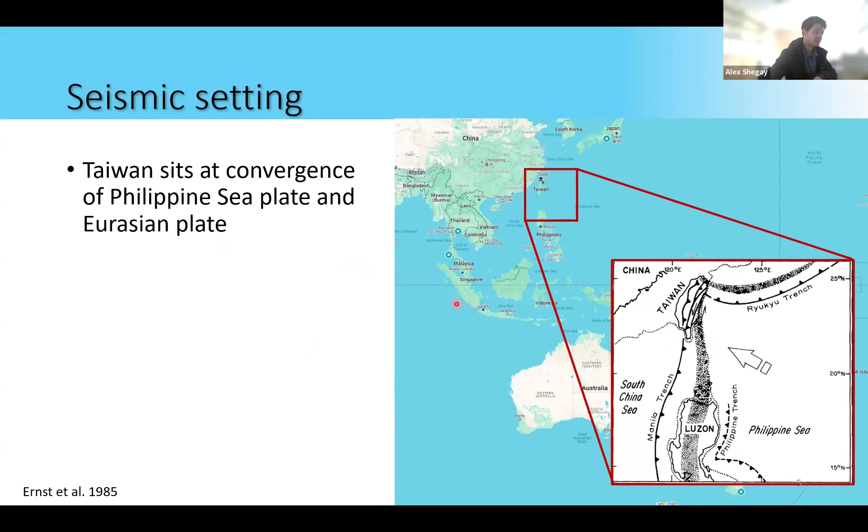So I always like to start with a map. I'm sure most of you know where Taiwan is, but it's always good to get orientated. Taiwan's located just off the coast of China here, about a 10, 11-ish hour flight from New Zealand. So I didn't know this until I started looking into this, but Taiwan actually sits on the Philippine Sea Plate, on the corner of the Philippine Sea Plate, which is quite interesting because it has movements from, I guess, all directions coming into it.

It sits on the corner with the Eurasian plate, and this is an image I found. You can see it's a very old image, but I don't think things have moved too much, should still be accurate. Basically, because it sits on a corner, you've got the Philippine Sea Plate subducting on the northern end and rising over the Eurasian plate on the western end. Most of the earthquakes actually occur in this subduction zone, which is the Ryukyu Trench, but a lot of these earthquakes are off the coast and are not very damaging. The more rare ones that happen where this Philippine plate rides on top of the Eurasian plate is what causes the most damaging earthquakes that they've seen in history.

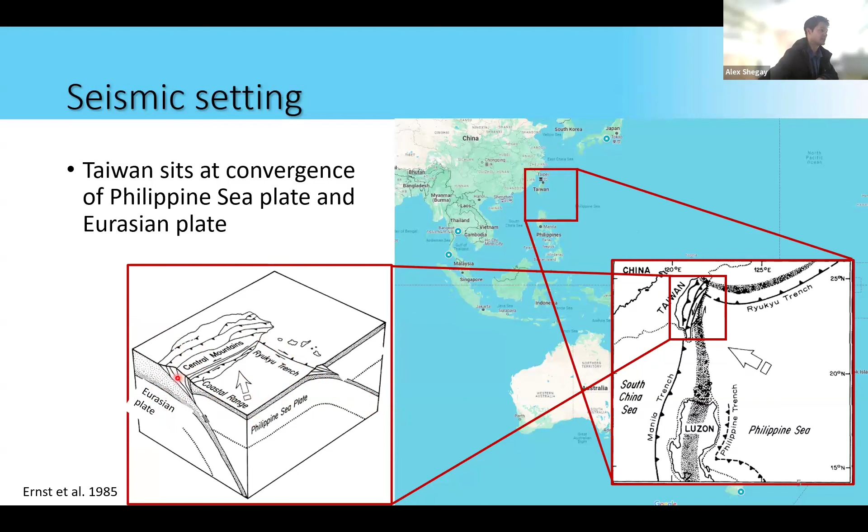So this is a quick overview of previous earthquakes, I guess the recent ones at least. The most well-known, I guess, would be the 1999 Chichi earthquake, but since then, every few years, I guess, they've had another earthquake with very similar looking damage. This is the one we're going to be talking about today.

But in the corner here, I've written a couple more years which correspond to some of the biggest earthquakes in Taiwan, which resulted in the most amount of damage and the most amount of casualties. You can see that between these three, 1999, it seems that quite a significant earthquake happens in Taiwan on average every 30 years. When I kind of saw this history, it made me think of Hualien as that once-in-a-30-year earthquake that seems to happen, causing a lot of damage.

On the bottom here, I won't talk too much about this, but is a history of how the design standard has evolved in Taiwan. Significant changes happened in 1997, 2005, and then in 2011. You'll see that the buildings that we looked at in Hualien were mostly pre-2000s, so before some of these new provisions about consideration of MCE earthquakes and consideration of local site effects came into practice.

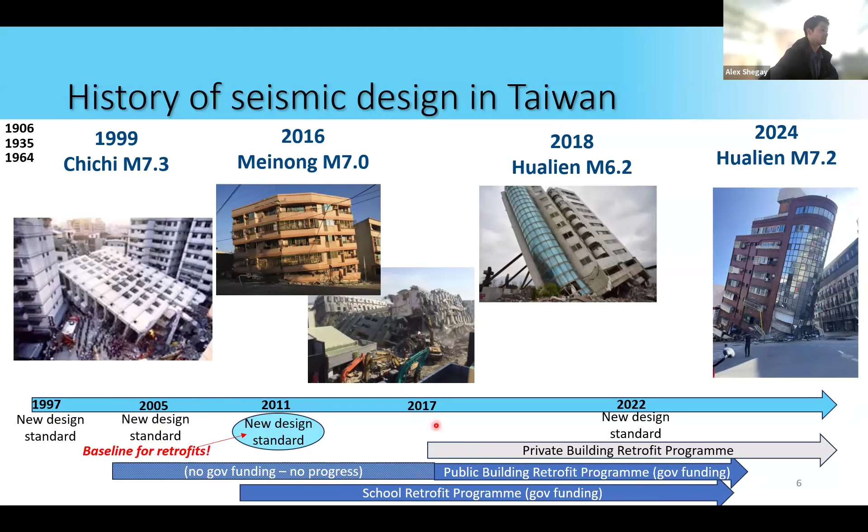So the earthquake overview on the left is the 0.3 second spectral acceleration graph. In the middle is damaged buildings in Taipei at the top and Hualien City at the bottom.

The earthquake happened on the 3rd of April 2024 at a depth of about 40 km, about 15 kilometers south of Hualien City. The epicenter was where this red cross is, but actually it got moved closer to the coast after some revisions, and quite a while away from Taipei City.

In total, about 28 buildings had partial or total collapse, but through all that, only one person lost their life as a result of this earthquake. Even then, that person escaped from the building during the first earthquake and then ran back in to save their cat and died in the collapse of that building in the aftershock, which came about 15 minutes later.

There's some similarities with how this earthquake looks to the Darfield earthquake in 2010 - similar distances from the city, similar depths, and similar fatalities. But what's interesting is even 150 kilometers away, there was damage in Taipei, despite the earthquake being so far away.

The biggest accelerations were felt in the mountains, actually, with Hualien feeling a little bit less than the mountains.

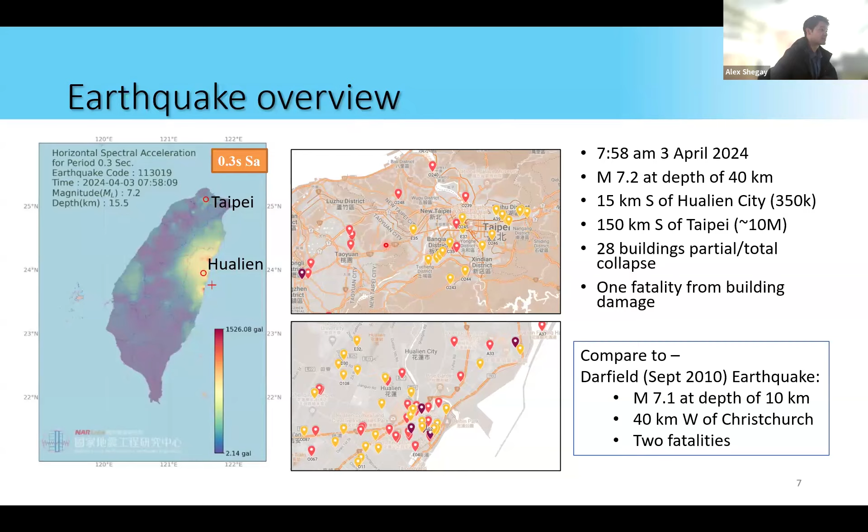So these are some of the spectral acceleration plots around the city. The very first one we saw was this one in the middle, which had high accelerations before the 1 second period mark. The red and purple line correspond to design based on MCE earthquake spectra. So you can see that shaking was very high.

But as we started to discover other spectra in the area, we saw that in some cases, the spectral accelerations above the 1 second mark were also very much above MCE level earthquakes.

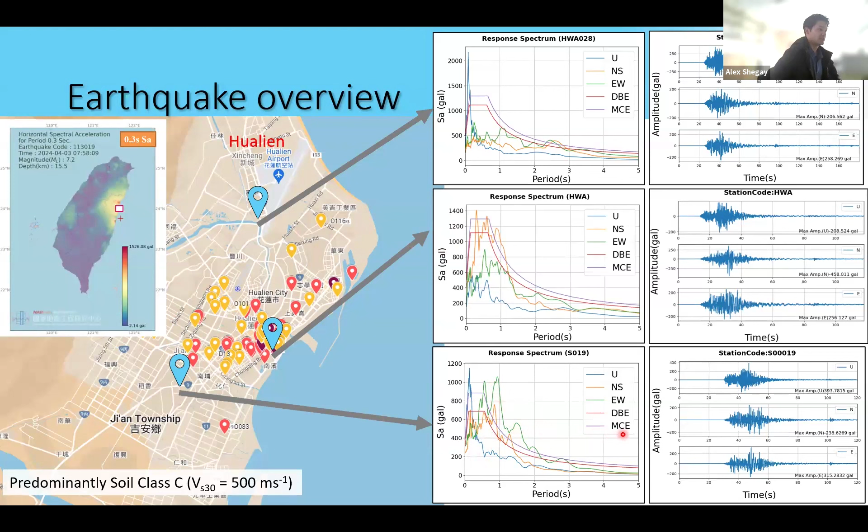So why did we decide to go and do a reconnaissance of Hualien despite not seeing that many fatalities or damage? Well, we know there's ongoing efforts in New Zealand in developing retrofit guidance, and we also knew that a lot of retrofitted buildings in Taiwan performed really well. So that was a really good case study for us to go and understand what they have been doing that seems to be so successful.

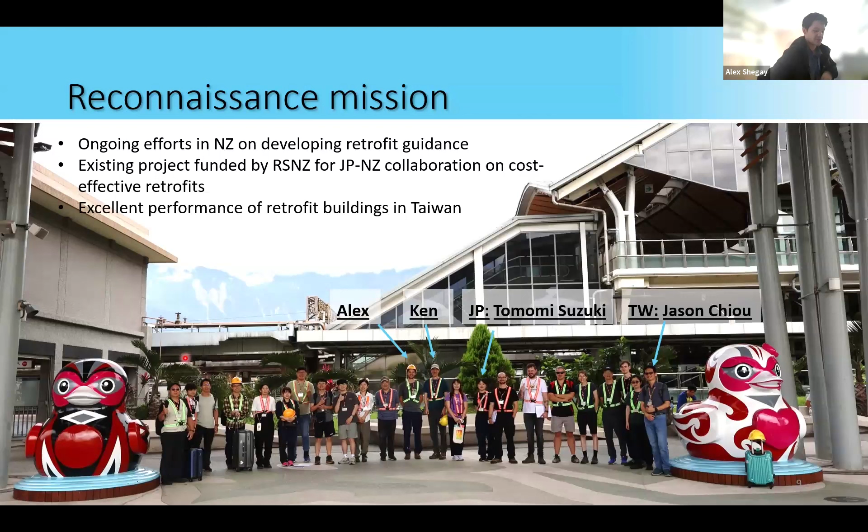On top of that, myself and Tomomi Suzuki, pictured up over here, have an existing project from the Royal Society of New Zealand, the Catalyst Seeding Project, looking into cost-effective retrofits. So all these three things came together at the same time, and we put together a team from New Zealand, from Japan, and from Taiwan, led by Jason, to undertake this reconnaissance, with the main objective being to investigate the policy behind implementation and the performance of retrofits using simple techniques. We'll talk about what simple means a little bit later.

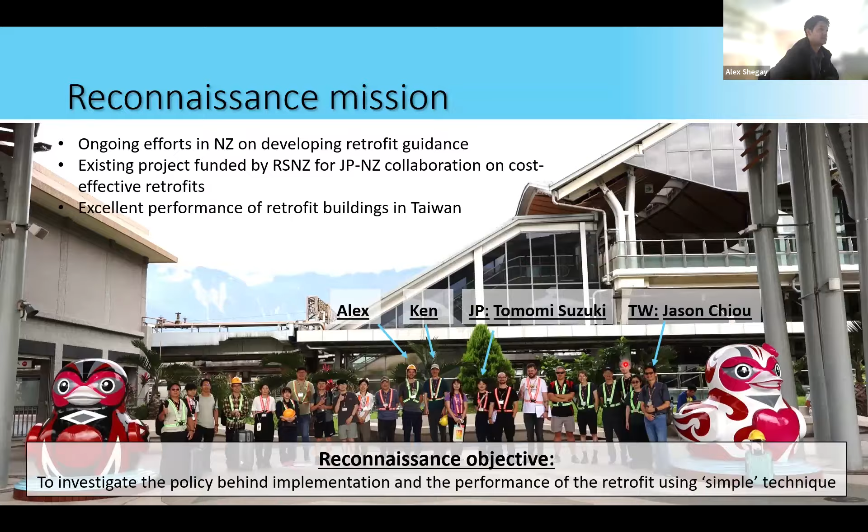So the building stock overview in Hualien consists of corner buildings, which are notorious for being vulnerable to these earthquakes, row buildings - similar low to mid-story height buildings lined up, abutting - and multi-story apartment buildings as well. So the ones that we looked at, a summary is shown in the plots that follow.

Most of them were residential, with the next biggest use being commercial. But to be honest, a lot of these buildings have a mixed use, so they might have a shop at the bottom with some residential floors up the top. So this is just showing the predominant use.

This graph shows the placard given to the building versus how many stories it had. And you can see, despite quite high accelerations at low period range, quite a lot of buildings low to mid story perform quite well, with a lot of these red buildings having some sort of construction deficiency or construction error. The surprise, I guess, for us was a lot of these high-rise structures didn't seem to be performing so well.

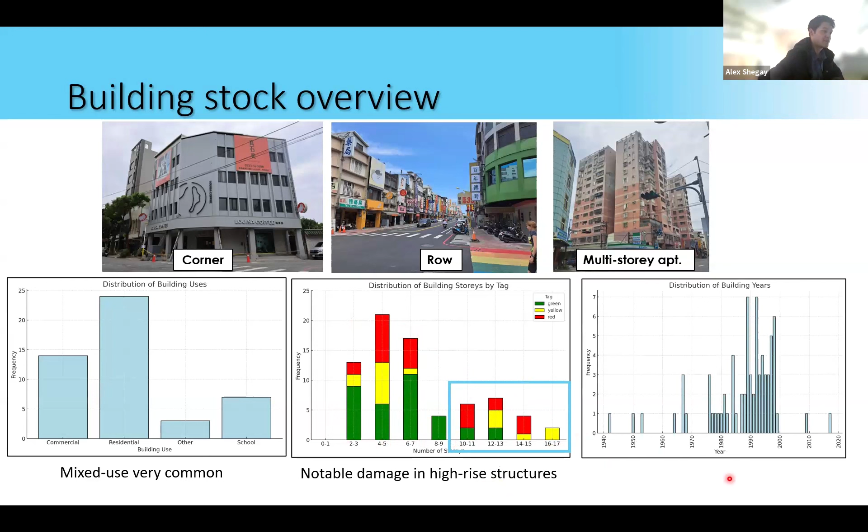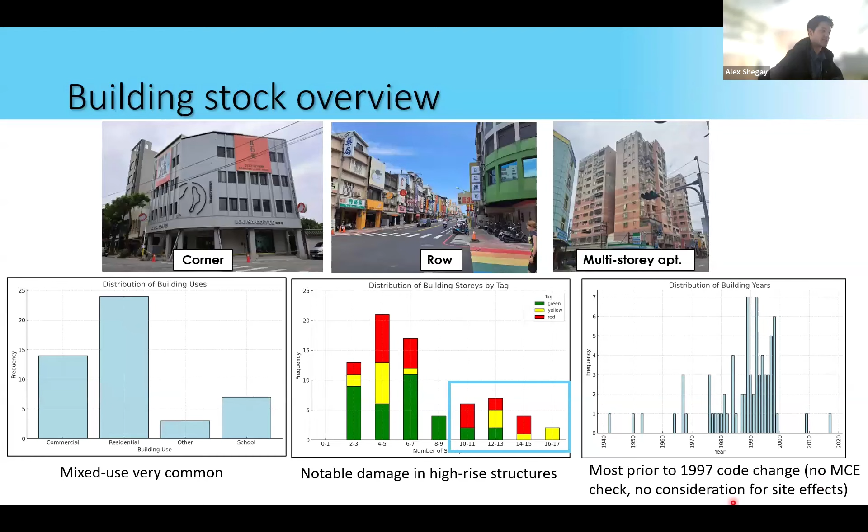In terms of the year, you can see that most of these buildings are before the 1997 code came into place, and before the 2005 code came into place, which is when MCE checks and consideration for local site effects came into play.

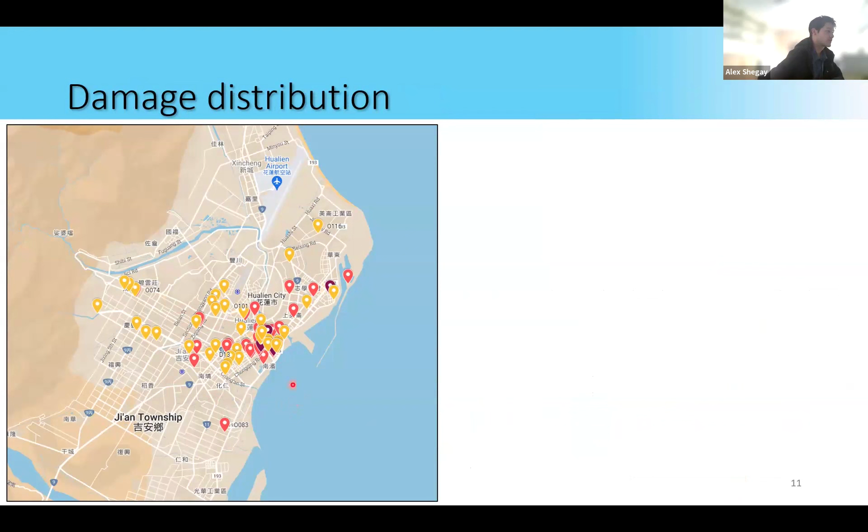So at first, when you look at the damaged building, so each pin corresponds to either a red tag or a yellow tag, with the dark red showing demolished buildings. It looks quite severe, but when you plot all the other buildings that we looked at onto the map, it actually doesn't look so bad.

So the damage was quite dispersed and actually overall quite limited. And there was a bit of a mystery for us, considering that spike we saw above the 1 second period mark in the spectral accelerations.

But when we started to look at some of the other spectral acceleration records in the area, we saw that actually a lot of the areas had reduced demands at the low small period ranges and a peak at 1+ second ranges.

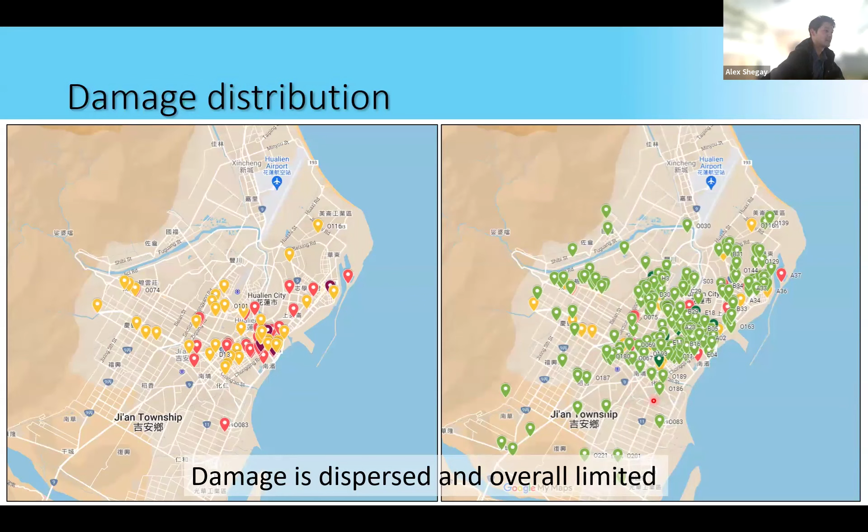So just a quick overview of the damage that we observed for low-rise structures. Here's a corner building. Typically, we often saw hinging in the columns, so it's a soft story collapse, which has been repetitively seen in Taiwan over the past few years in earthquakes.

But it's often accompanied with images like this, where you see either a splice in the plastic hinge under the column, and even when you do have a splice, it's quite poorly detailed. You can see a significant lack of transverse reinforcement. In other cases, the structure had low reinforcement ratio and high axial demands, such as this one here.

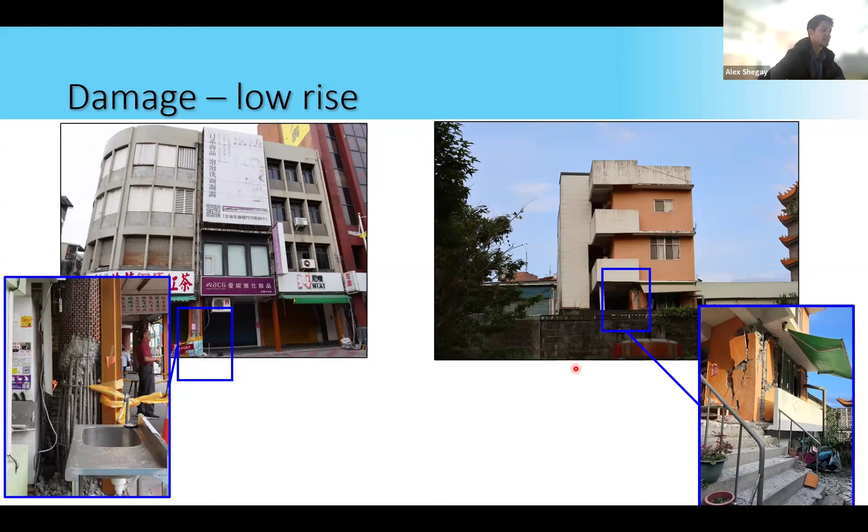One other contributing factor is often that these buildings had an asymmetrical placement of vertical elements. Particularly the corner buildings, this is a plan of this building specifically, you'd often have a structural wall or an infill wall along the back face with some non-structural partitions, which results in a lot of stiffness on the back face and not much stiffness on the street front. And so the torsional response contributes significantly to the damage that we have seen.

Of course, like I said, poor detailing in a lot of these buildings contributed to some of the damage that we saw.

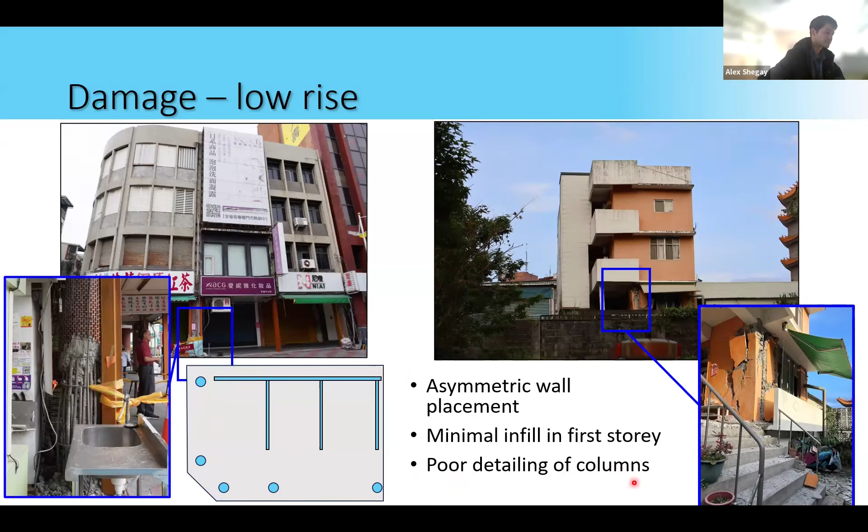For high-rise residential, this is one case study that I'll show, which has 3 buildings on a common podium, with the peripheral buildings experiencing severe damage, with the central building experiencing moderate damage. So trying to figure out why the difference happened despite these buildings being so close to each other.

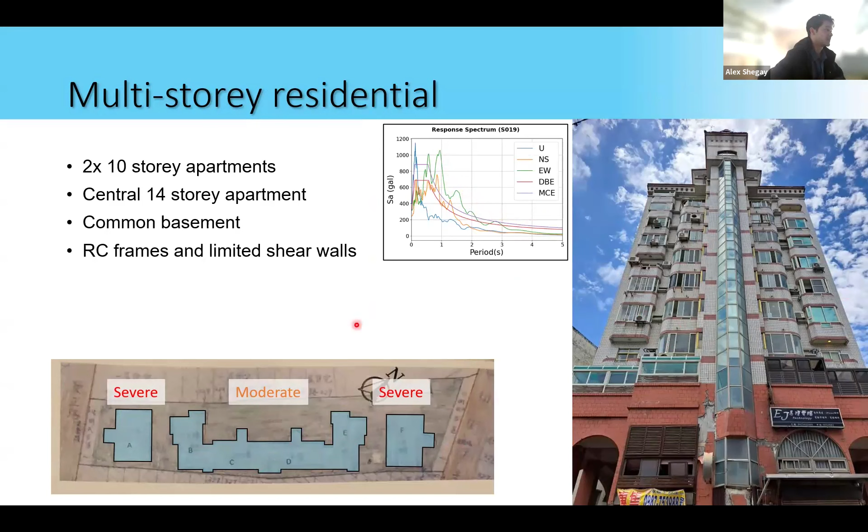Again, like I said, there's that peak above the 1 second mark in the spectral acceleration plot, well above the MCE spectra, which eventually helped us explain why these high-rise buildings were experiencing the damage that we saw. So looking at these peripheral buildings first...

You basically had double height columns on the outside here, but single height columns on the inside, which essentially resulted in deformation incompatibility, and eventual failure of these internal columns.

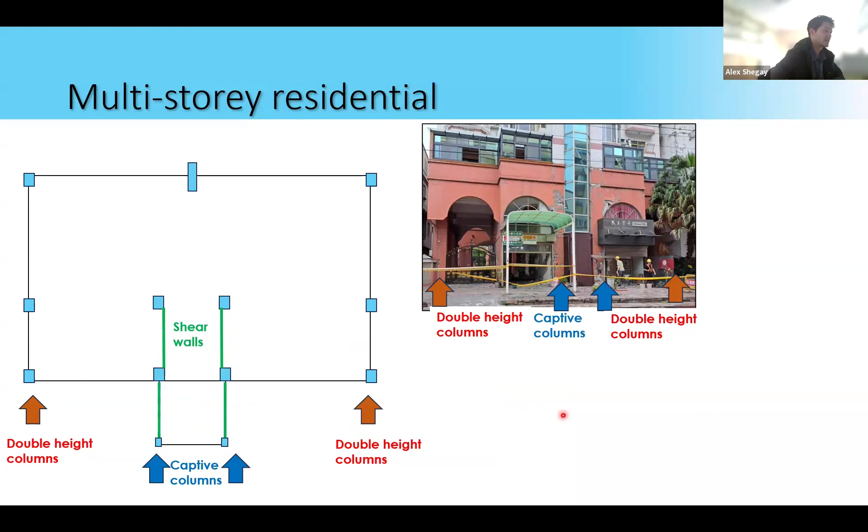In addition, although there were some walls present on the inside in the longitudinal direction, it wasn't quite clear if these were structural walls. They were quite thick, about 250 or 300 millimeters thick, but the reinforcement didn't seem to correspond to that, very lightly reinforced. And so you had quite severe axial failures through the thickness of the walls as well.

In the transverse direction, you can see the spans are very large and there's no walls to take up some of the lateral demands. And so this is part of the reason we think this building experienced the damage that we saw. Of course, it didn't help when you have fire hydrants running through your concrete sections as well.

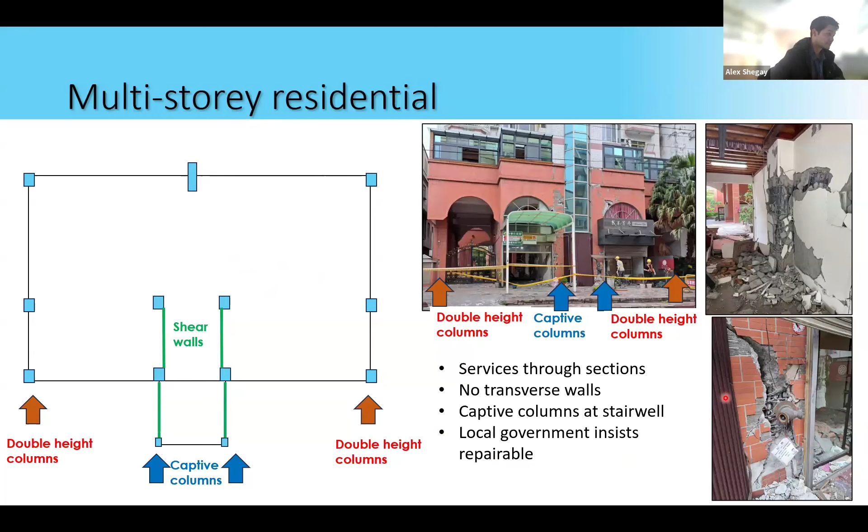In comparison, the central building, which had moderate damage - you can see each one of these blue, yellow, orange boxes corresponds to one of these pictures. Although some of the pictures, some of the damage looked quite severe, such as this picture here, these turned out to be non-structural walls, so like 100 millimeter thick walls with single layer reinforcing. So they would not be considered as severe structural failure, whereas some of the structural walls, which this building did have, didn't have as much damage.

Some light cracking was observed. You can see that the frame in general, this is a picture looking down the hall here, is looking quite healthy overall. Of course, there was, again, some construction issues.

You can see here is a lap splice and the column hinge when all the transverse reinforcement is lumped to the top. So I guess your transverse reinforcement ratio is correct, but not well distributed. And really bizarre cases of concrete cores being taken out of a column, but then getting put back in for whatever reason. So that got exposed during the earthquake too.

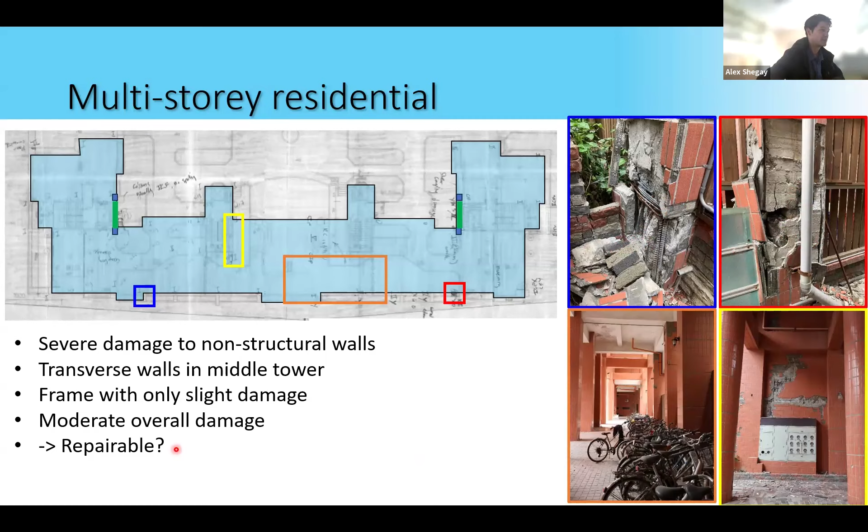So unlike the other one, this one seems potentially repairable, whereas I think the local government was saying both can be repaired. And this is a list of...

Common construction errors that we observed, or in case of partition walls, maybe oversights. So these internal partition walls are not designed to be structural, but they're made of concrete or infill masonry. And so they will act as a structural component, which can drive your shear demands into the columns, causing some of the damage we observed.

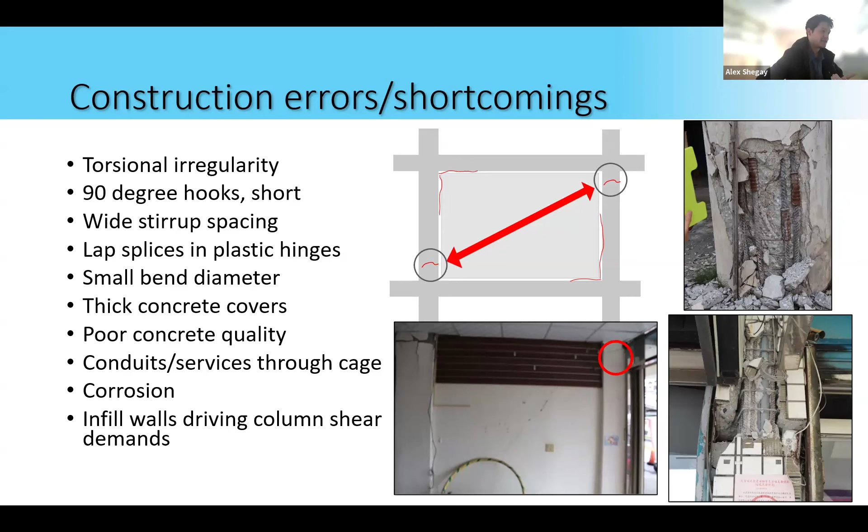There's issues like this where that's just a construction issue where the contractor couldn't get the hoops around the couplers, so they put the hoops inside the longitudinal reinforcement, so that didn't help. Concrete cover in columns being cumulatively thicker than the column itself, and then some PVC reinforcement running through the center of the column.

So in terms of the actual quantitative data that we collected, something called the Hassan index, which some of you might have heard of, is basically two indices, and it's an area ratio of the area of walls over the area of the entire floor plan, and the area of columns over the area of the entire floor plan. So a simple way to think about this is the numerator is your capacity, and the denominator is your demand—how much inertial mass you have on your floor.

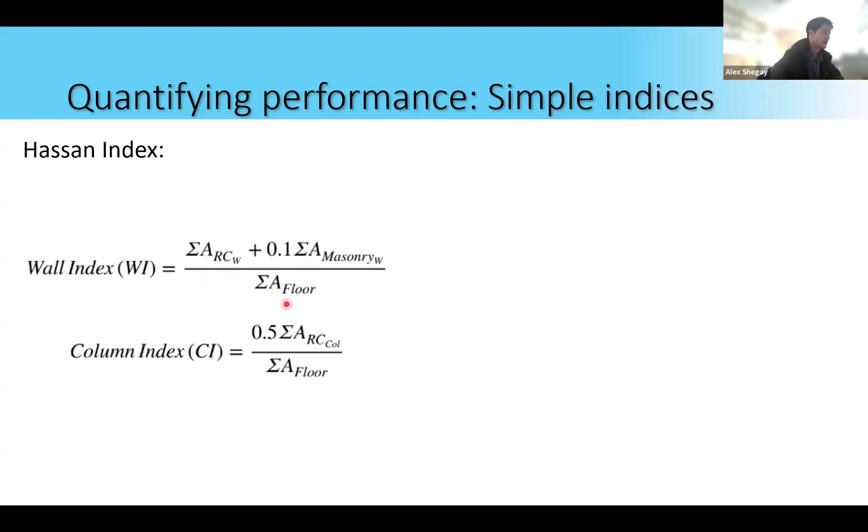Numerous studies in the past have studied how these indices relate to damage. In general, if you plot the wall index and the column index on the X and Y axis, you can think of it as a 2D capacity to demand ratio. Anything in the corner which has not many walls and not many columns should experience severe damage. Anything towards the right-hand corner will have a healthy building.

And data from earthquakes seems to support that in general. Here is data from Taiwan in 2016. This is from, I think, a Turkish earthquake in the 90s.

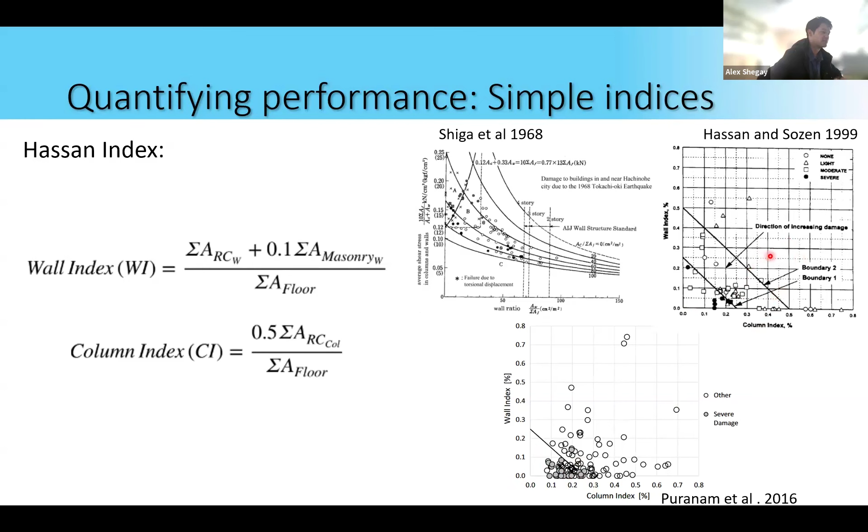So we did the same thing with the buildings that we looked at. We classified them into low damage and high damage, which is the blue and the orange. And generally, the data seem to agree with this red boundary that's been proposed by Hassan, which is supposed to divide your damaged from undamaged buildings.

This plot, of course, doesn't take into account the size of the demand. So you'd expect some blues to go under the line and maybe some orange even go over the line. Of course, it's a very crude index—things like construction errors are not captured.

But one prevalent issue in Taiwan is this issue of having torsional irregularities. So now we're thinking about how we can penalize some of these points for the fact that they have torsional irregularity in the plan.

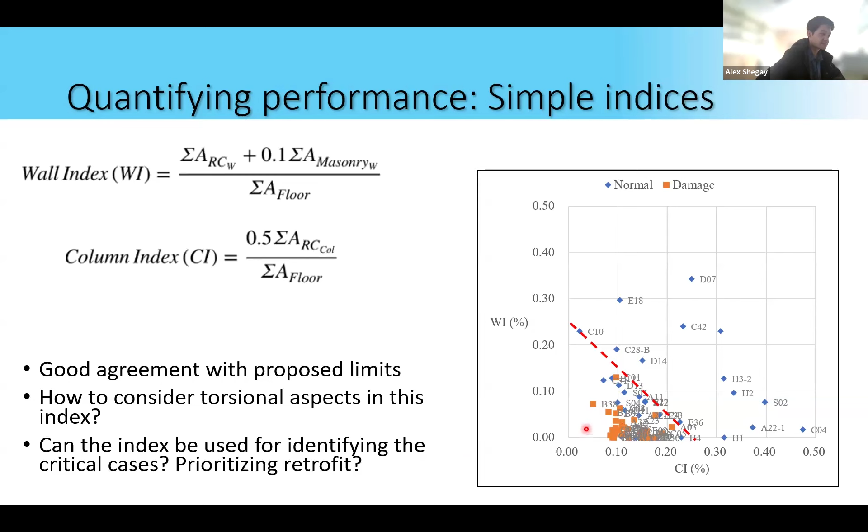Another use of this map is potentially to identify critical buildings in the city that hasn't been struck by an earthquake yet, to say, well, if your building is placed over here, perhaps this will be a priority for retrofit. Taiwan did do this in one of their retrofit programs—they used this method to identify critical cases.

Here is some data of us demonstrating how that may work. This is a building we looked at, E35, which had no retrofit. And this is building E36, which did have retrofit. They're very similar buildings, very similar location. But E35 has a low column ratio. For E36, they injected the columns, put some walls in, and drove this point outside the red line.

And so the impact of that is that this building had axial failures in the columns, whereas this building looked a lot healthier. So this is one way how we can use one of these plots to prioritize retrofits.

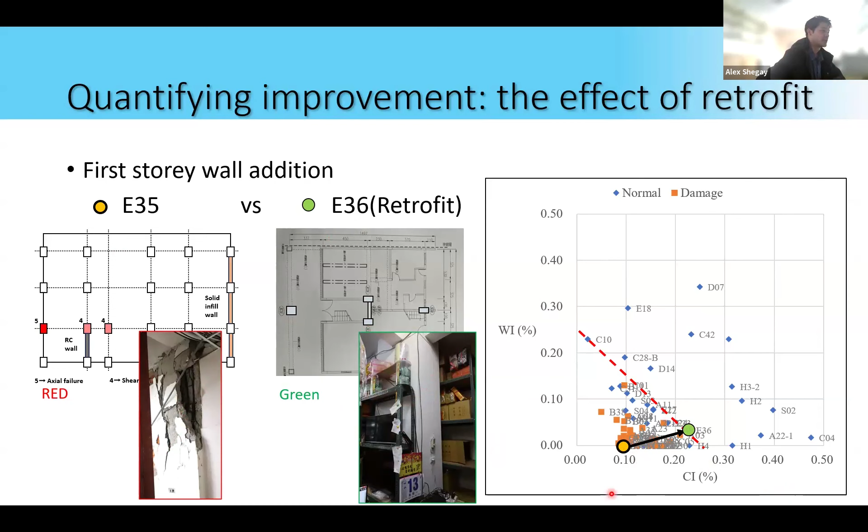I'll pass over to Ken here to continue talking about retrofit in Taiwan.

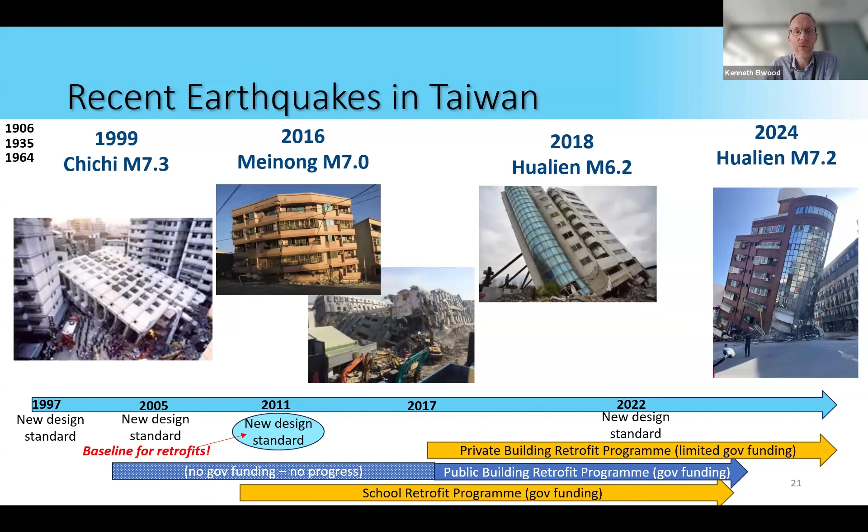We're running a bit behind time, so I may skip through some of these a bit quickly. The school retrofitting program in Taiwan was initiated shortly after the Chichi earthquake, where there were several hundred severely damaged and some collapsed schools.

What I particularly want QuakeCoRE people to notice here is that they specifically ran a 10-year program to prepare for the execution of this retrofit program. And in that time, NCRE did a very significant research program on the performance of school buildings, really trying to refine their ability to assess these buildings and develop cost-effective retrofits.

And then after that preparation, after that research and the development of guidelines, the execution of the retrofit program was initiated in 2009, and it's been running now for over 14 years. The latest numbers we have in terms of the total retrofits are from a couple of years ago, but they're about 37% of the way through.

All indications are that it's been really quite effective.

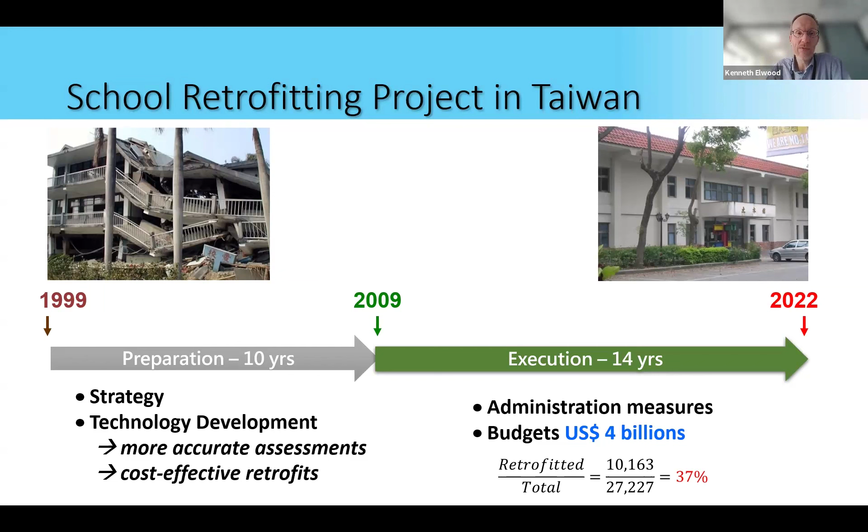Buildings subject to this program are essentially all buildings constructed prior to the Chichi earthquake that are occupied by people. The retrofit requirement is they must be upgraded to 100% of the 2011 building code. If there are any future changes to the building code, that does not affect the target they're retrofitted to. They continue to use that 2011 code as their benchmark.

It's very impressive. They've managed to keep those retrofit costs to about 11% of the rebuild cost of the school. That's remarkable, considering the costs we're seeing here in New Zealand for retrofit.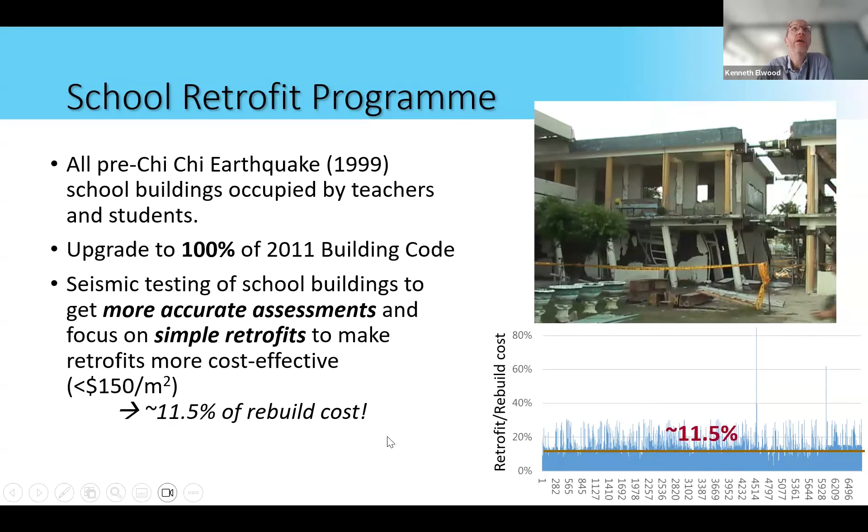One example of a school we visited in Hualien was the Hualien Girls High School. There are essentially two buildings right next to each other. One that was not retrofitted was very severely damaged, probably close to collapse. The other, retrofitted one, almost not a scratch on it—showing the advantage of having retrofitted that building, obviously.

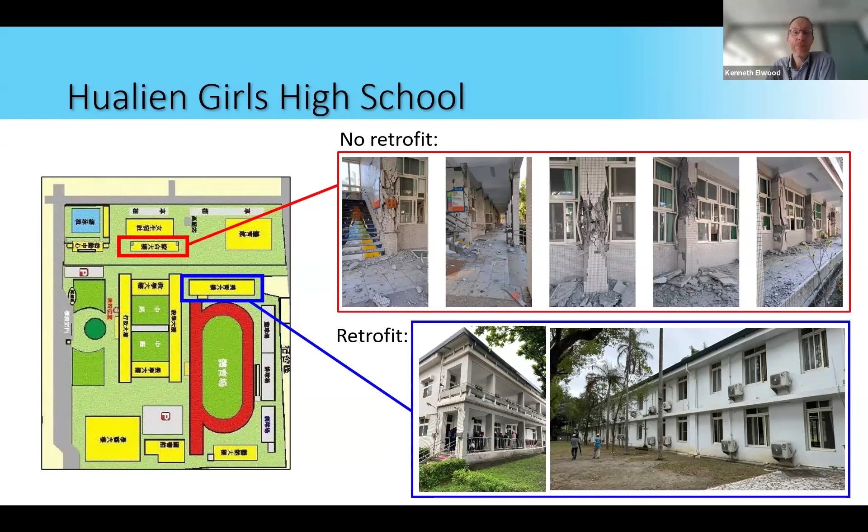The private building retrofit program is quite a bit more complex, as private buildings are owned by all different people. You don't have a single ministry to work with and so on. It is a voluntary program in Taiwan. They're really focused on the concrete buildings, particularly those with soft and weak first stories that have been observed to fail again and again in past earthquakes.

They essentially give two options here: either you do just a weak story retrofit, fixing that prominent vulnerability, or you can retrofit up to 80% of that 2011 code.

There's a subsidy given for this, and there's a limit on that subsidy—that amount is actually pretty modest. When you think about retrofit costs these days, that's not a huge amount, up to a maximum of 230,000, and that really puts pressure on the engineer and the building owner to try to keep those costs down as much as possible, to get as much bang for buck as possible.

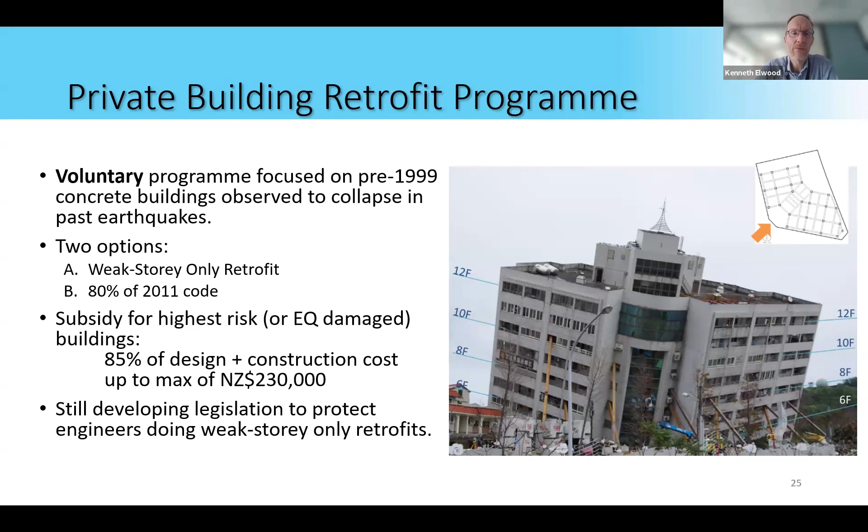There's some discomfort among the engineering community about doing weak-story-only retrofits, where you only focus on that one vulnerability. There's a feeling that in order to roll that out more widely across Taiwan, there's going to be a need to develop legislation to protect engineers using that form of retrofit. That's still in progress, but it has been implemented in several cases.

Here is a building in Hualien that had a weak story failure, and in the background you can see a building that was retrofitted with BRBs, primarily on the first story. There are actually BRBs extending up higher, but it was primarily that weak story retrofit. I tend to call this your biggest bang for buck retrofit.

If you plot the risk reduction you get against the cost of the retrofit needed to address that vulnerability, this is your biggest bang for buck retrofit. In the case of Taiwan buildings, it's relatively obvious what this big bang for buck is—it is this weak story, and predominantly the weak ground story. In New Zealand, as I'll talk about in a moment, it's not always quite so obvious.

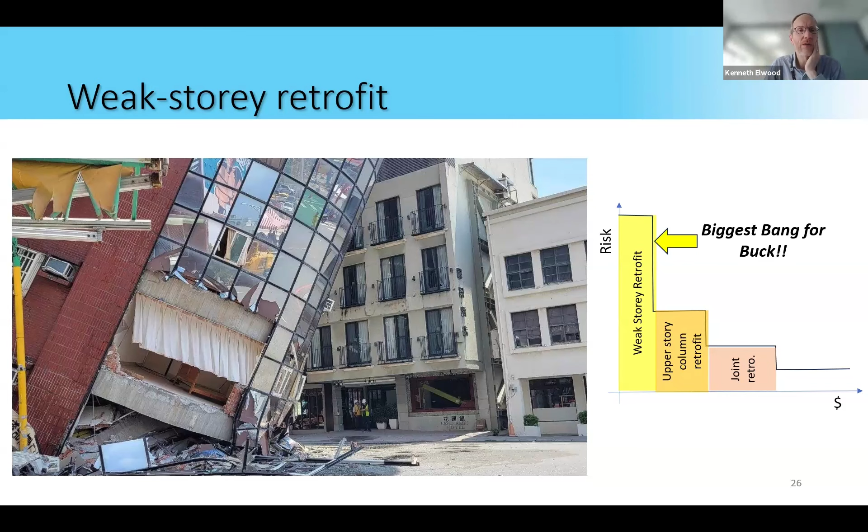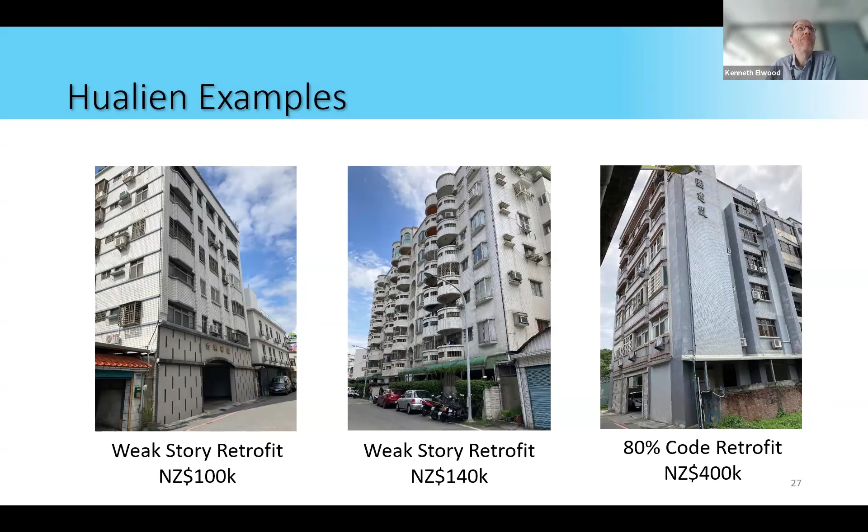So I wanted to think about this in a New Zealand context, and I think probably the closest analogy is really the unreinforced masonry simple strengthening project being developed by the Joint Committee for Seismic Assessment and Retrofit currently. Essentially a similar concept, in that there are simple retrofits focused on the highest risk vulnerabilities.

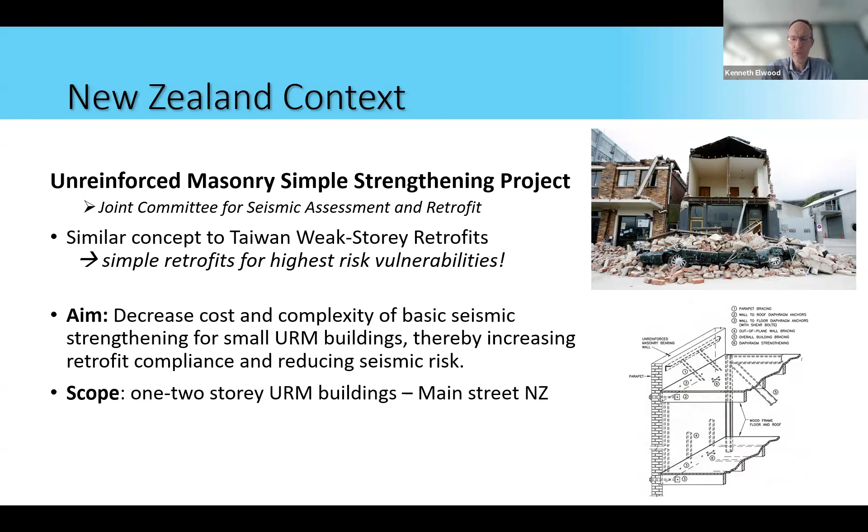This approach is being applied or considered for application on 1 or 2 story unreinforced masonry buildings on sort of Main Street, New Zealand. The idea is that we'd like to reduce the cost of the retrofits, making them simple, off-the-shelf type implementations. This is still a project in development, but it has quite a few similarities to the weak story retrofit approach in Taiwan.

In the case of concrete buildings, I think the situation in New Zealand is a bit more complex, and it's harder to establish that single biggest bang for buck retrofit. We've got precast floor issues, non-ductile walls, connections between the diaphragms and the cores, and multiple weak story issues.

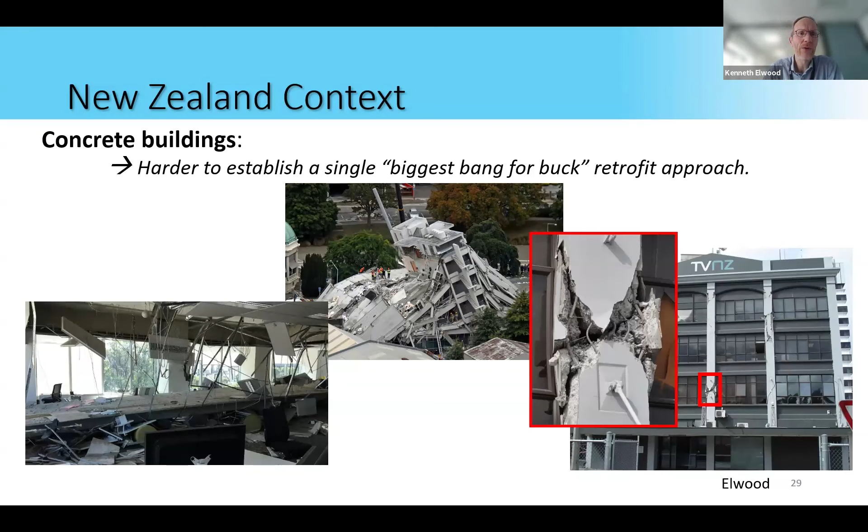So it's not always obvious where that biggest bang for buck is going to come from. I started thinking about, despite that, is there some way we could implement something like this in New Zealand? I'm going to skip this slide for a moment and go straight to the steps.

The first step would be to identify your key building vulnerabilities. For each of those vulnerabilities, assess a risk as low to very high. Then develop simply a retrofit concept, not a full retrofit design, but just to think about what sort of concept would be used to address each of those vulnerabilities.

Then think about what sort of risk reduction you're likely to get from each of those retrofit features addressing each vulnerability. If we had research giving us a cost coefficient for each of those features, in a relative sense, how much more expensive or less expensive one specific retrofit feature is relative to another.

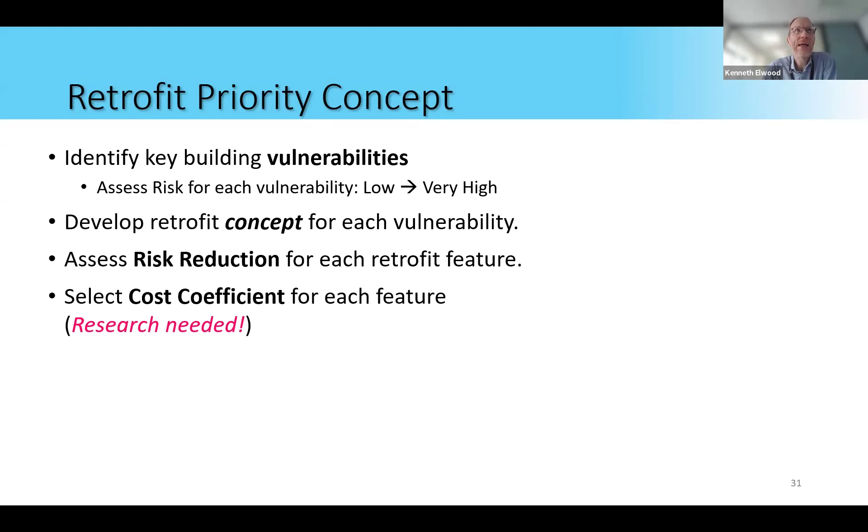Then maybe we could sort these retrofit features by the risk reduction achieved per cost. In that way, we could identify what our biggest bang for buck retrofit is and focus in on that. Maybe that bang for buck retrofit could get us below some minimum risk level we want to achieve, and we could still plan to reduce that further over time by addressing other vulnerabilities.

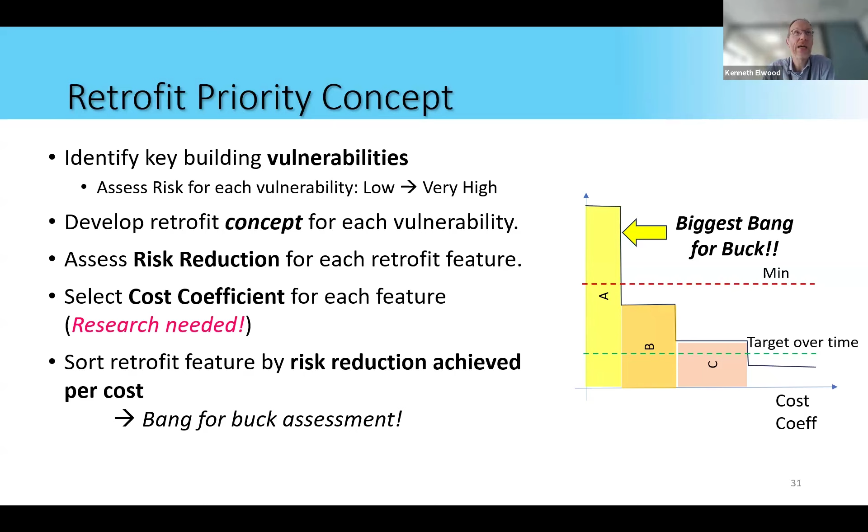This is just a concept. It needs further work on a couple of fronts, but it's something I wanted to share with you as an idea developing amongst the team as we were over there.

The other really big thing is they really focus on cost effectiveness. A good example is their approach to the foundations put under some of the retrofits. For example, if you have a simple frame and want to put in a concrete wall to retrofit it, here in New Zealand we'd likely also accompany that with a pretty significant foundation for that new wall. In Taiwan, they say no, the wall's going to make it better, so let's just leave it at that, and there's a huge savings by not putting in a new foundation.

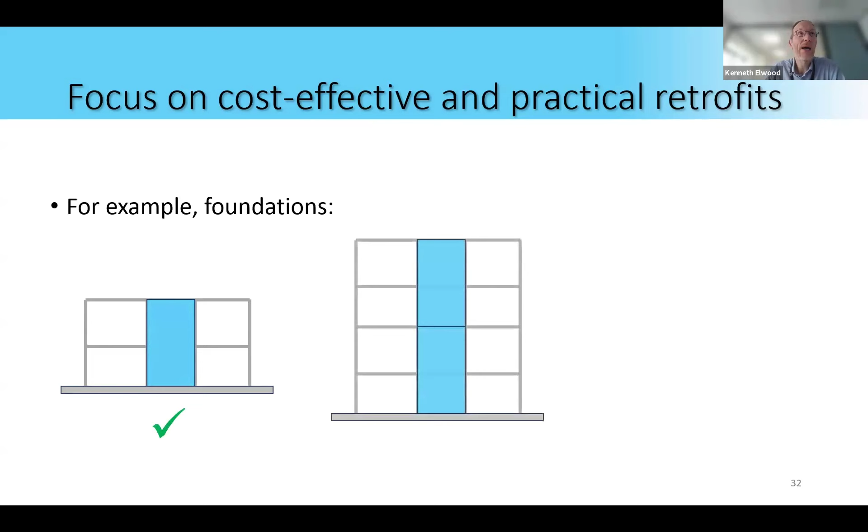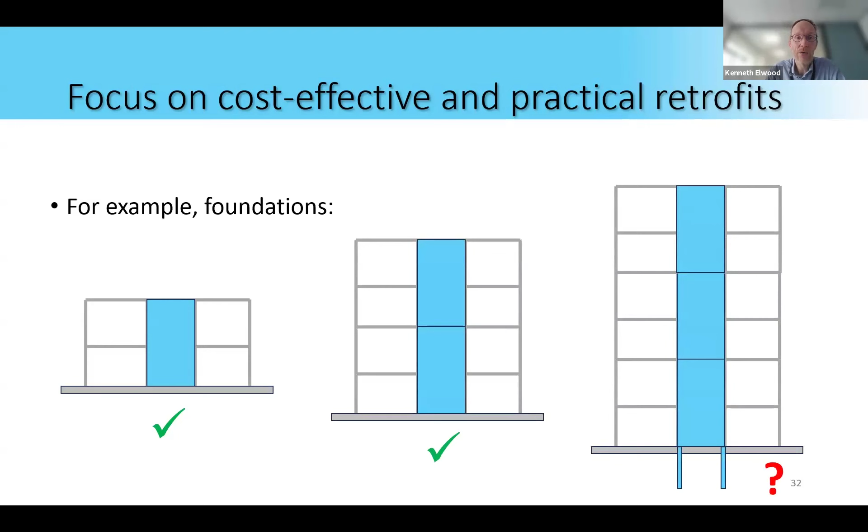So we probably accept that easily. For 4 stories, maybe we accept that as well. There's probably a limit, however, where when you start to get much taller, you're probably going to want some form of new foundation put in as well. So again, I think there's some research needed here to identify what that limit might be.

So with that, I'm afraid we've gone a little bit over, but let me just summarize a few key messages from Alex and myself. There has been investment in building code improvements over the years, particularly since the 1999 Chichi earthquake, and we see that paying off in terms of lower losses and faster recovery in these more recent earthquakes. The simple area indices that Alex talked about look like they can be useful for triaging structures for retrofit.

The approach in Taiwan of focusing on simple, cost-effective retrofits we see as an effective way of achieving wider implementation. It's interesting that in Taiwan they take a different approach for private buildings, using subsidies with voluntary programs, as opposed to here where we have a mandatory program without subsidy. So I think it's good to see these differences of approaches, and whenever we see those differences, there's great opportunities to learn.

With that, I think we'll open it up in the last 5 minutes here for some questions.

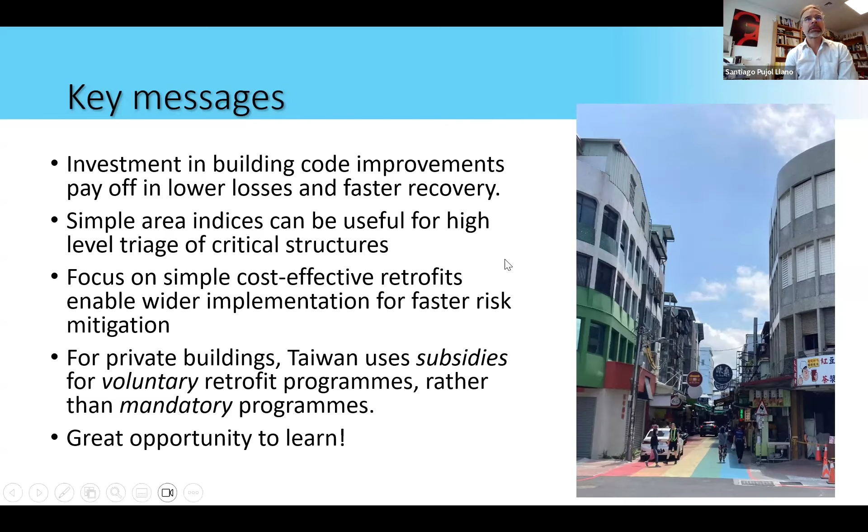Thank you, Ken, and thank you, Alex. I think what you presented here is very informative, very useful. So again, I'd like to thank you. This is such an urgent topic for us, and the effort to go to Taiwan and bring these lessons back is much appreciated.